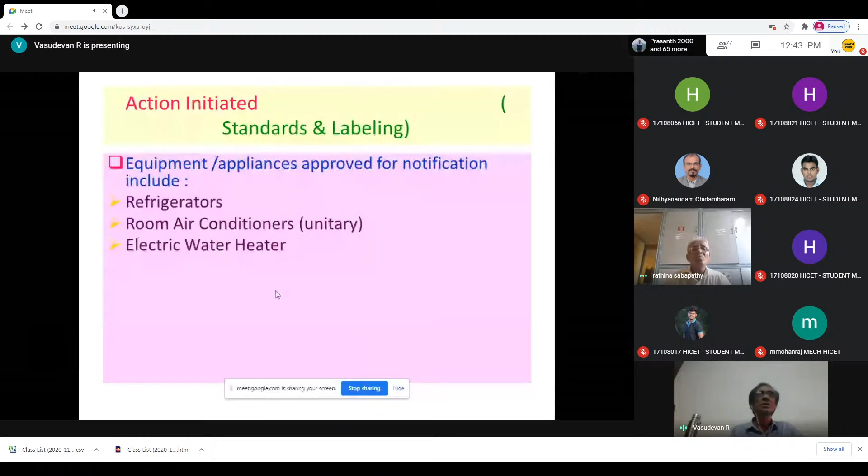So initially they brought refrigerators, room air conditioners unitary. Unitary means right from 1 ton, 1.5 ton, 2 tons, electric water heaters, electric motors, then agriculture pump sets, electric lighting, ballasts, industrial fans and blowers, air compressors.

So we will just touch upon HVAC. HVAC means heating, ventilation, air conditioning. Heating is when the temperature outside is less than inside. Ventilation is sending the air out from the space or supplying fresh air.

So this ventilation is most important in the post-COVID situation, especially in the recent past. Now all the malls, theaters are getting opened, and all the hotels, restaurants are getting opened. So apart from air conditioning, they also require whether there is a proper air change. The air change and supplying fresh air into the space will lessen the problem of virus spreading.

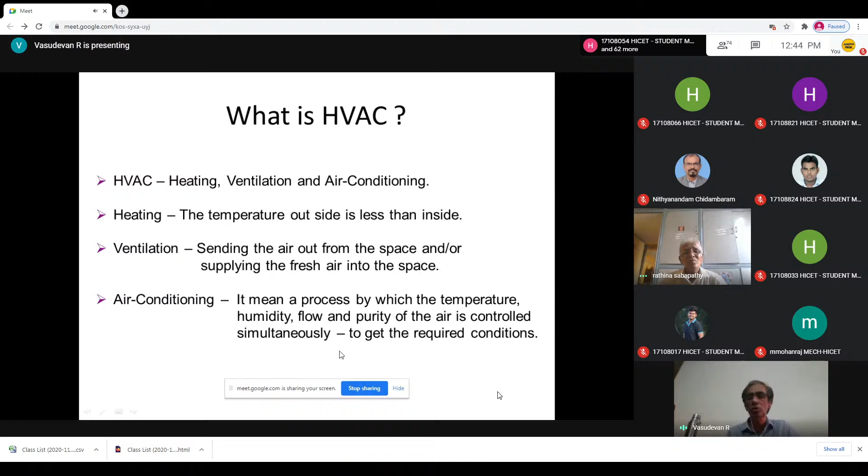So now air conditioning. Air conditioning means it's a process by which the temperature, humidity, flow, and purity of air is controlled. The temperature for air conditioning application is about 24 degrees centigrade plus or minus 1, and the humidity is 55 to 60%. Then flow and purity of air is also controlled. These are all the surrounding conditions based on which the air conditioning is worked on.

So air conditioning removes all our discomfort. That is, it is cooled, warm, excess air moisture is removed. This is called dehumidification. The conditioned air is circulated gently, air is filtered, bad air is exhausted, fresh air is taken in, air is mixed with the outdoor air.

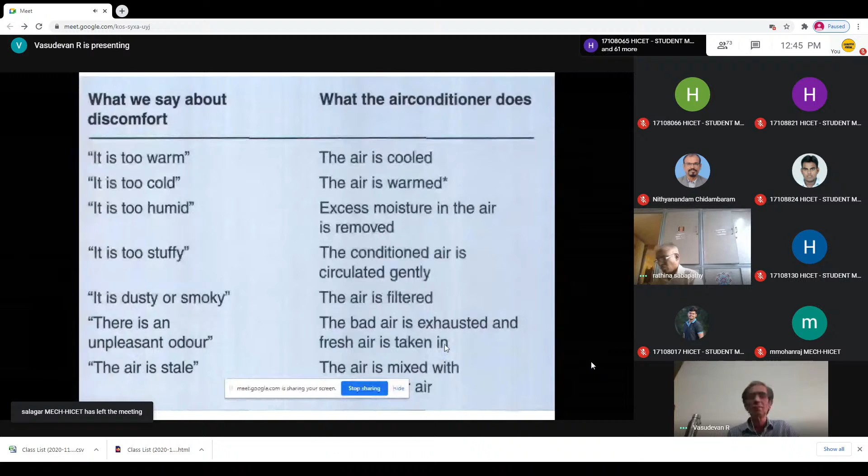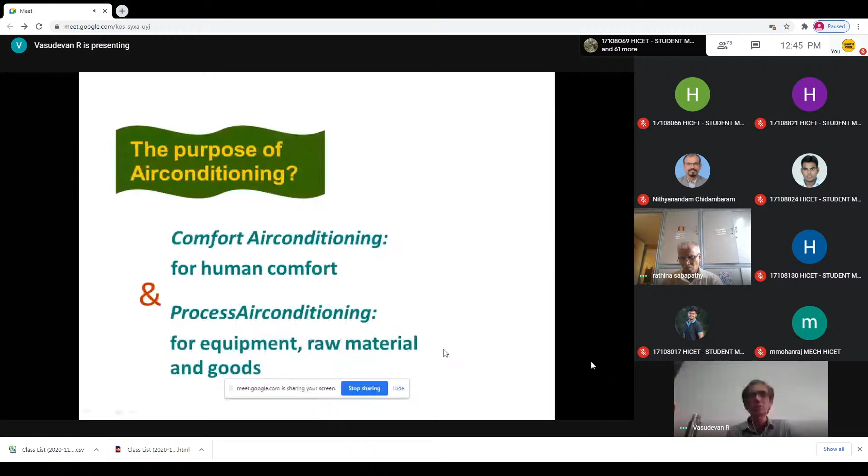Now the purpose of air conditioning is twofold. One is comfort, this is for human comfort, and the other is process air conditioning, for equipment, raw materials and goods. So major process air conditioning applications include textile.

In Coimbatore and places like that it is more applicable, because you have got a lot of textile mills, where humidity is the primary concern, which is getting solved by this air conditioning application. Then printing and paper manufacturing need close temperature and humidity control. Electronics and computer rooms need air cleanliness, low temperature and close humidity control.

Pharmaceuticals need indoor air quality, positive static pressure in the space. Positive static pressure is most important because it should be higher than the atmospheric pressure. Atmospheric pressure is 1.03 kilogram per centimeter square. It should be above that.

And hospitals and operation theatres need quality of air. Indoor air quality is most important. In hospitals, especially operation theatres, they have got filtration through HEPA filters, and they have a lot of fresh air application, and some of the air is taken out purposefully so that the same air does not recirculate.

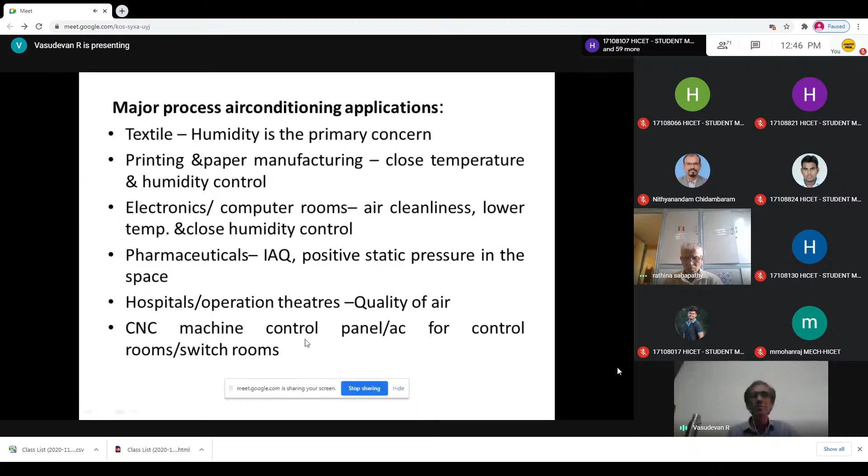Then CNC machine control, that is panel air conditioning. Now normally we call it 1 ton, 1.5 ton. Normally the term which we are using in our room air conditioner, which we use in the house, we say it is a 1 ton, 1.5 ton.

So what is 1 ton? 1 ton is, without increase in temperature, the heat required to melt 2000 pounds of ice in 24 hours. This is without increase in temperature, called latent heat. So each pound of ice, the latent heat of ice is 144 BTU per pound. So multiplied by 2000 pounds divided by 24, that is per hour, so 3000 kilocalories per hour.

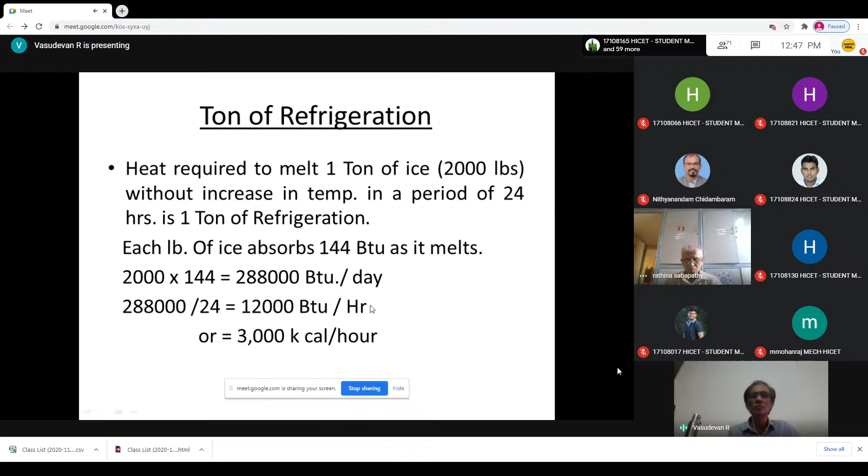So this means in a room, if you are putting 1 ton, if you are designing it for 1 ton for a room, that means it is taking away 12,000 BTU per hour of heat through the air conditioning. So in turn, which it cools. This is air conditioning. How many more?

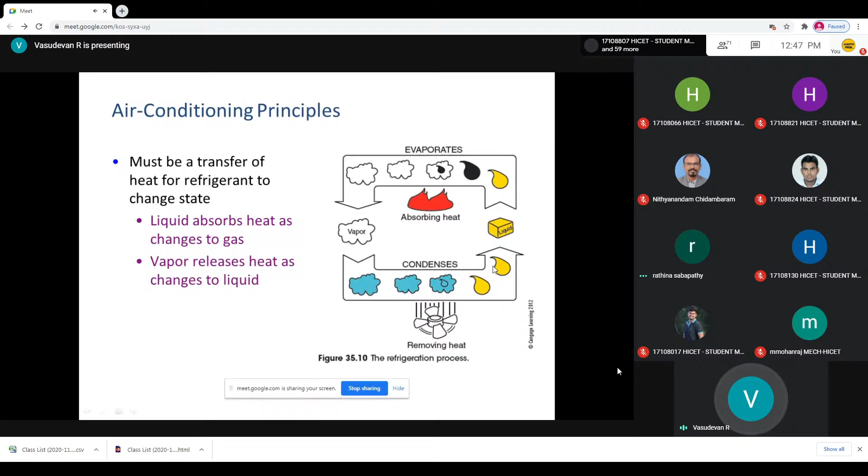So there must be a transfer of heat to the refrigerant to change state. Liquid absorbs heat as it changes to gas, then vapor releases heat as it changes to liquid. This is basically a refrigeration cycle, which consists of compressor, condenser, receiver (only in some applications), metering device, and evaporator.

Low pressure, low temperature vapor comes to the compressor. The compressor can be of different types - one may be reciprocating, another rotary, or scroll compressor. All these compressors are there, and depending upon the tonnage and application, they are used. So low temperature, low pressure refrigerant comes to the compressor, and it is compressed to high pressure, high temperature vapor.

Then it is condensed to a liquid. The purpose of the condenser is to condense the high pressure vapor by removing the heat from the high temperature vapor. It is condensed to a liquid, but the pressure is maintained up to this point.

So high pressure, medium temperature liquid comes to the metering device. The purpose of the metering device is to do the expansion. Expansion means the pressure is reduced. When the pressure is reduced, low pressure, low temperature vapor comes to the evaporator.

The purpose of the evaporator is to evaporate the refrigerant, taking heat from the source. For example, in a room air conditioner, the unit inside the room which we are able to see, that's called the evaporator. In a refrigerator, the evaporator is kept in the freezer chest. In a water cooler, it is in the tank. So depending upon the application, the evaporator is fixed.

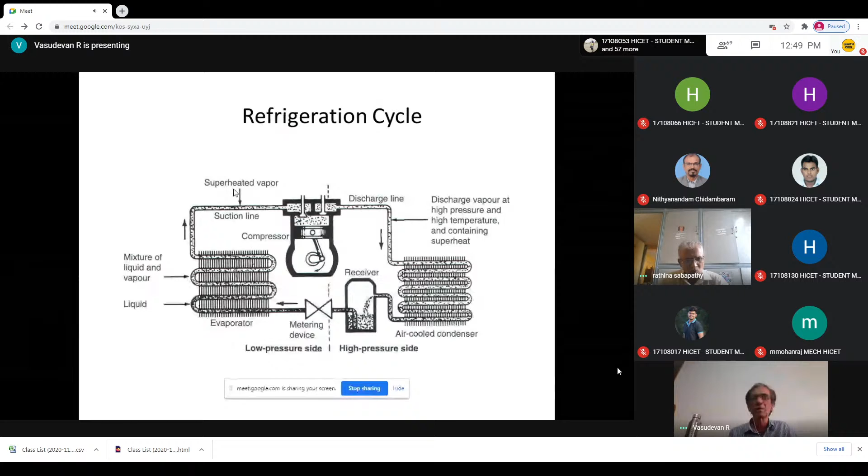Now the purpose of the evaporator is to evaporate. How does it evaporate? Because the refrigerant has a low boiling point. Because of the low boiling point, the refrigerant is evaporated, so low pressure, low temperature vapor comes back to the compressor, and the whole cycle moves.

This is the generic refrigeration cycle. It is divided into high pressure side and low pressure side. The whole thing is plotted in a psychrometric chart, where dry bulb, wet bulb, and humidity are all plotted.

With this, we can even plot outside air mixed with the return room air, and the room air conditioning conditions. So with this, you are able to plot the various conditions of coil entering, coil leaving, and all that. Then you will be able to determine whether the air conditioner is performing to the rated standard.

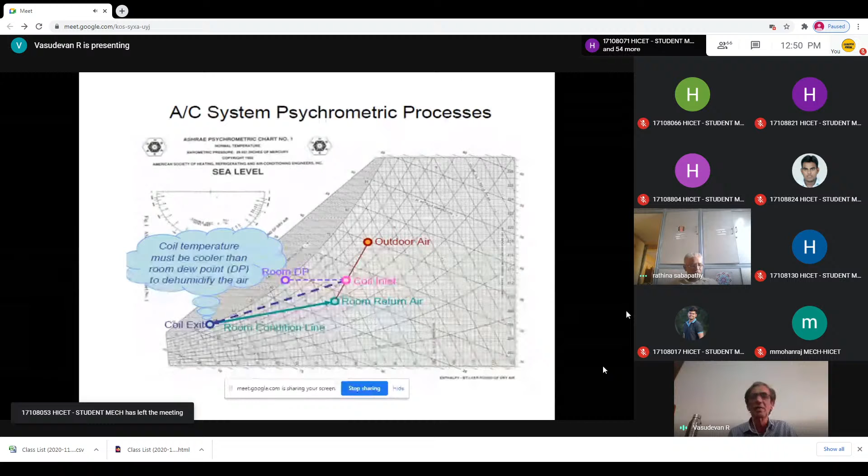Now there are two types of refrigeration cycle - one is vapor compression cycle, another is vapor absorption. Vapor compression is the cycle we saw earlier with the compressor and all. Vapor absorption utilizes the ability of one substance to absorb larger volumes of vapor of another substance when cold, and then give them up when heated.

For that, they use lithium bromide and other substances. The vapor absorption refrigeration system doesn't use a compressor. Because of this, though the installation cost is very high, the operating cost is very less. But in the vapor compression refrigeration cycle, the initial cost is less, but the operating cost is very high.

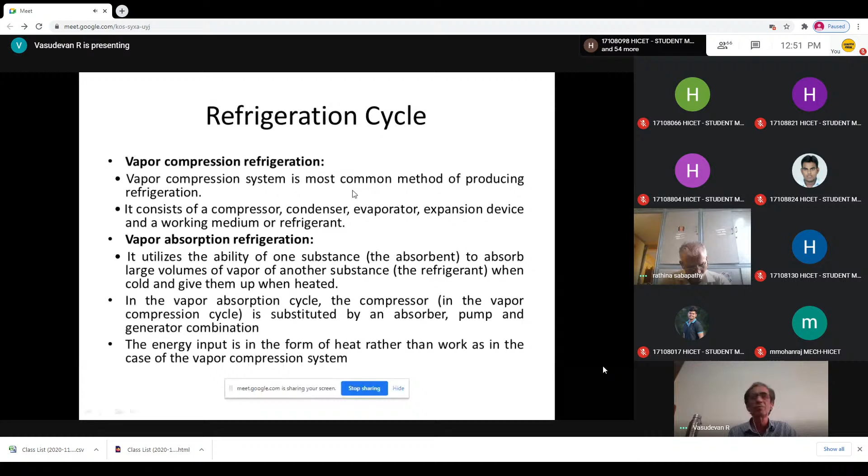Now these are all the main refrigerants which we are using. It is divided into pure and mixture. Under pure, you have natural, CFC - CFC means chlorofluorocarbon, hydrochlorofluorocarbon, and hydrofluorocarbon. This is natural - ammonia, propane, and carbon dioxide.

Carbon dioxide is also a refrigerant. Earlier it was used, then it was discontinued in the middle. Now again it has gained momentum, and a lot of people are starting to use CO2 also.

Now CFC - CFC is R12, dichlorodifluoromethane. This is R114, R11. This CFC is totally banned. It should not be used because its ozone depletion potential is very bad.

And HCFC - HCFC is R22 and R123. Even R22 is banned in the US. Now in India, we continue to use it, as per the Montreal Protocol, we can use it for another 5 years.

So HFC is R134A, R32, R125 - these are all used presently in all air conditioning systems. Now the mixture types are zeotropes and azeotropes. These are basically blend refrigerants. R407C is a mixture of R134A, R32, R125 - the percentage varies. R290 and all these are also used.

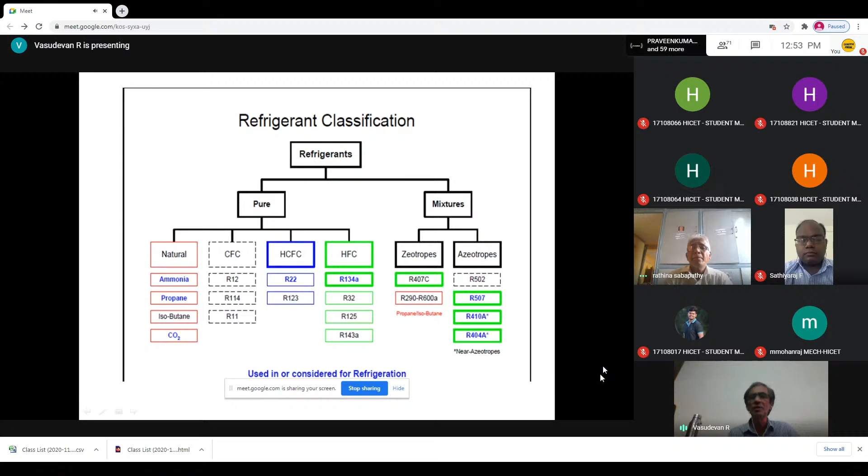Now this is the energy efficiency ratio, EER. EER is equal to cooling capacity divided by power consumption. This energy efficiency determines the star rating of the air conditioner.

You would have seen in all air conditioners, split units and all, they are affixing single star, 2 star, 3 star and all that. How do they arrive at this?

The EER for a 1 ton unit: 3514 is the cooling capacity in wattage, divided by 1500 watts. This 1500 watts is the actual wattage consumed by the 1 ton unit.

So 3514 divided by 1500 is 2.34. If it is 1.5 ton, again all the things will vary. Now this star rating is 2.3.

In the case of star 5, it's 3.1, meaning the power consumption will be less. So as the star value goes up, the power consumption reduces. Now in recent times, star 1 has been discontinued by the government, so only star 2 to star 5 are available.

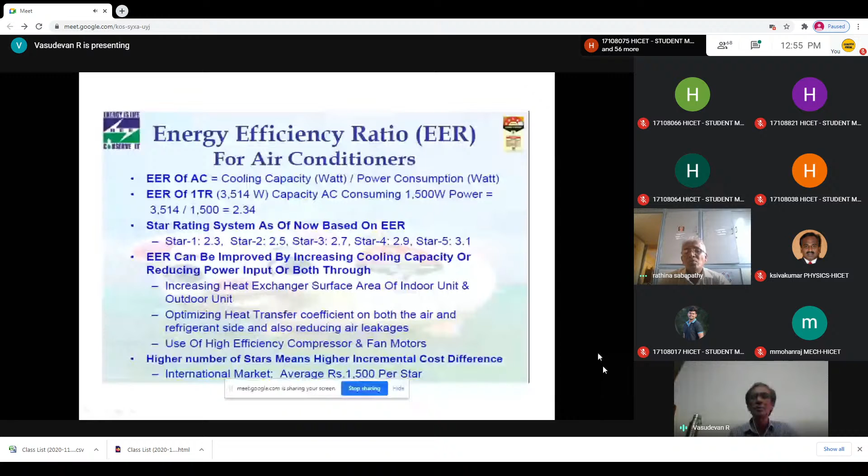Energy saving tips for AC: set the room temperature between 25 and 27 when a hot day is expected. Turn on the air conditioner early rather than waiting until the building becomes hot.

Adjust the air conditioner louvers. Have your unit regularly serviced. Install your air conditioner on a shady side of the building. Always prefer a higher star rated air conditioner than a lower rated one.

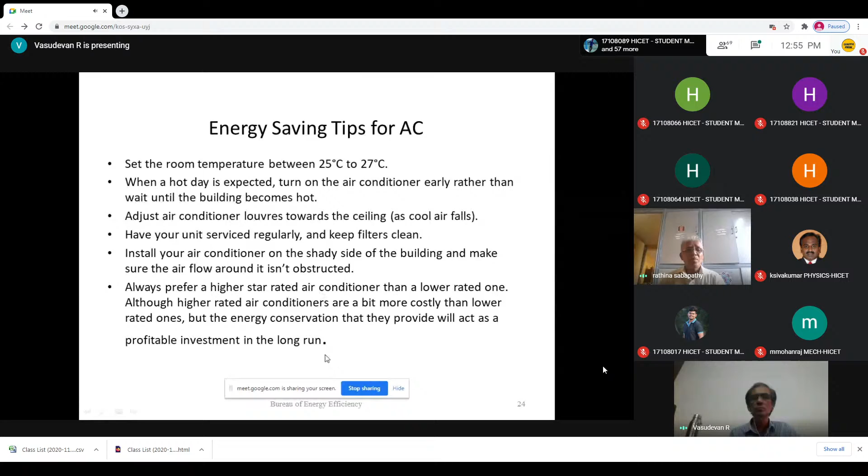The conservation of energy refers to the efforts made to reduce energy consumption and increase the energy efficiency ratio. While doing energy conservation, safety is the first thing you have to ensure, and avoid measures that have negative impacts on people and communities.

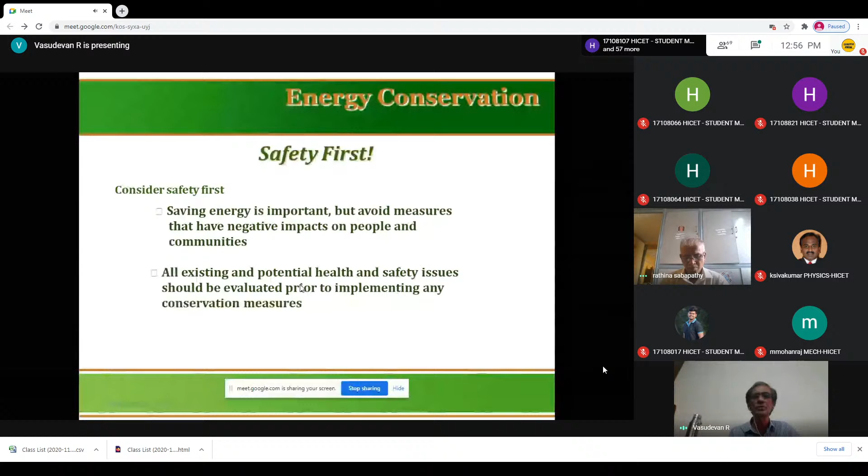Key steps for a successful energy program are outlined: plan the effort and share the vision, design and implement the program, provide support and resources, check progress and evaluate results, and sustain the effort.

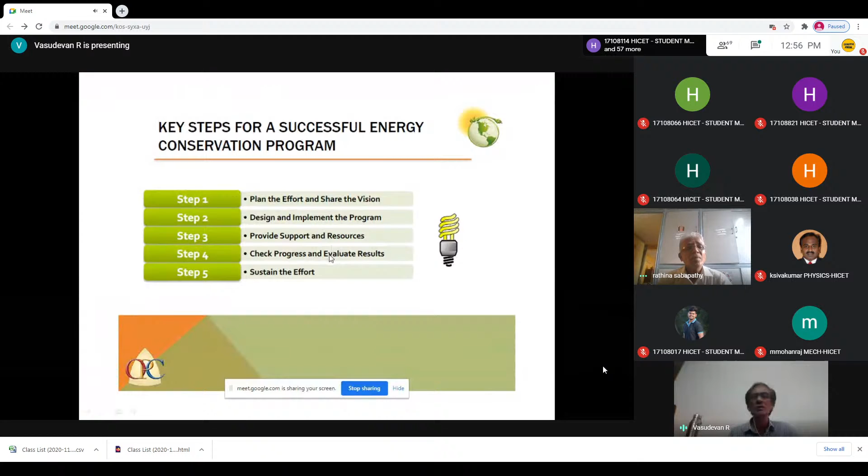Now these are all the points, I will end up my lecture with this slide. Now what we need is new behavior for lighting.

My colleague has already explained about lighting, how judiciously you have to use it. Then technology, transportation, heating and cooling, personal comfort.

Sir, I am finishing, sir.

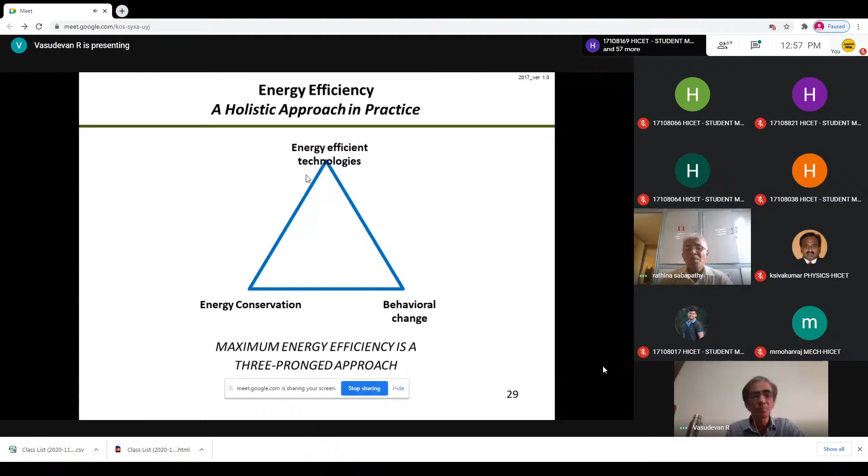So we have some questions. Mohan, sir. Yes, sir, please.